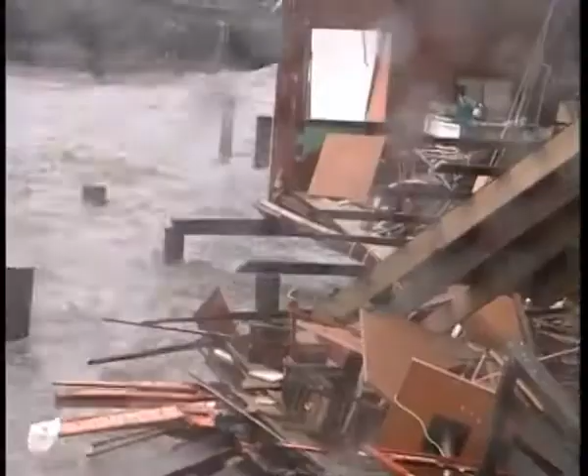Everybody knows the whole New Orleans area is built in a saucer. All of the rainfall that falls on New Orleans is trapped in that saucer and has to be mechanically pumped out. The city is surrounded by levees, so every drop of water that comes into the city, whether by rainwater, infiltration under the Mississippi River levee, or infiltration through the sand strata from Lake Pontchartrain, has to be lifted out. So it requires pumping stations of very large capacities.

We're built on a swamp, and the soil dries out. It doesn't subside as much as it decomposes. When the city subsides, it increases the problems.

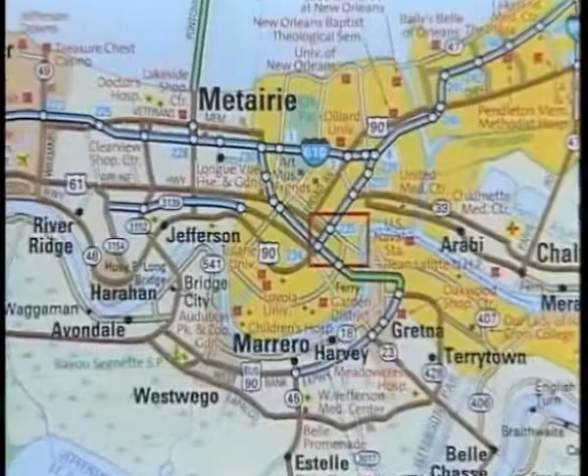Jefferson Parish is located below sea level. Our elevations vary from 4 feet below sea level to almost sea level. So all the runoff, through a network of canals, ends up at the lakefront, where we have our major pump stations. The street systems in this area are dictated greatly by the arrangement of the canals.

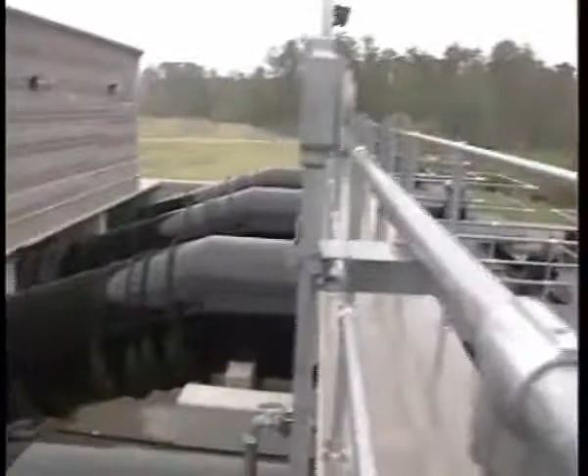We have a system of drainage which is relatively old. Most of our old subsurface drainage system has been designed for a 2-year storm frequency, although our canal systems are designed for a 10-year frequency. We have stations here capable of pumping several million gallons of water a minute in order to evacuate the water, and there are many stations in the area with that capacity.

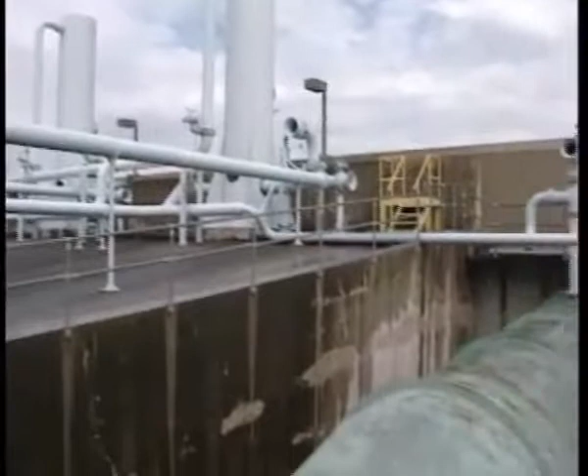On the east bank of Jefferson Parish, we have 5 major pump stations. On the west bank of Jefferson Parish, we have about 14 major pump stations.

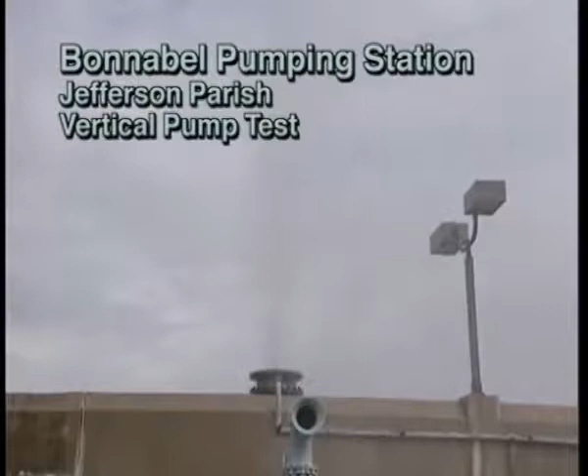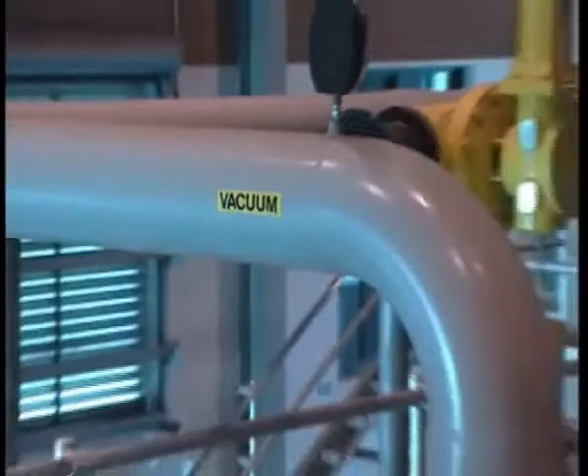Size and capacity of the pumps dictate the size of the station, also the total pumping capacity that is desired, based on the drainage area the pumping station is going to serve. First we develop a preliminary plan for the layout of the station, the discharge basin, and the intake basin.

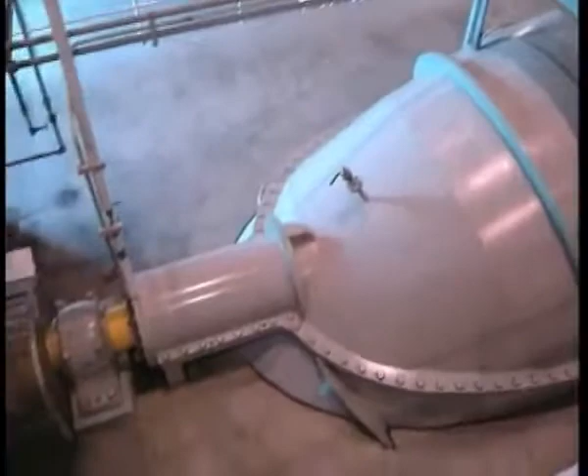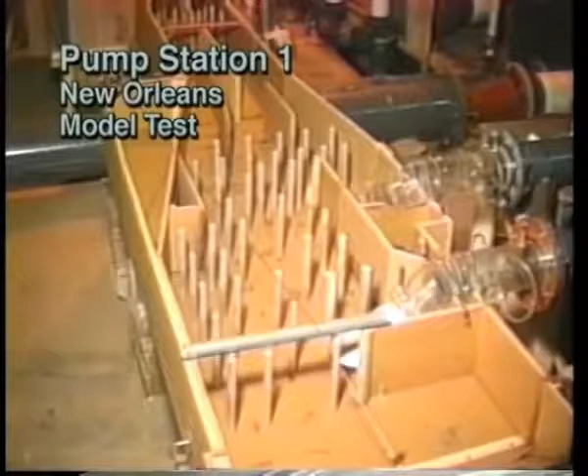Based on the theoretical layout, we provide these plans to an independent model testing laboratory, who constructs a model to maybe 1/10 or 1/9 the size, and they test it to see if our design is hydraulically efficient. Because if it isn't efficient, you can lose 5 or 6 feet of head, which in terms of horsepower and expense, over the 30, 40, or 50 year life expectancy of the station, could add up considerably.

We went in and modeled every station that we made an improvement on, and we found out that the theory back at the turn of the century was: if you want to pump more water, you put in more pumps. Well, that's not necessarily efficient, because some of the pumps were fighting each other.

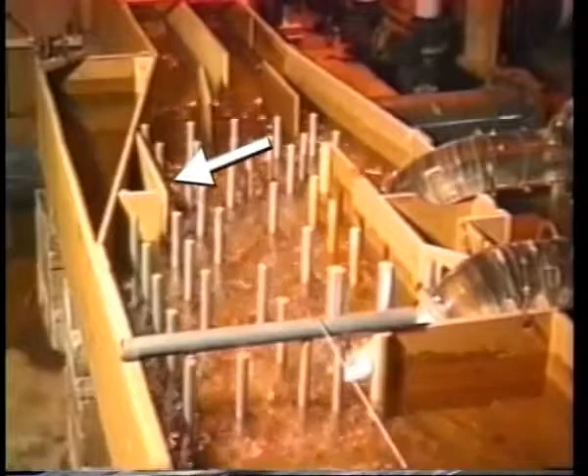By making an authentic model of the station, we were able to find things like vortices being developed on the floors of the stations, corrected merely by putting in small walls in some of the stations. We've been able to improve the stations by 1 or 2 pumps sometimes.

Right now, this station is so efficient, the canal that supplies it is inadequate. We have to more than double the size of the canal coming into the station to get the water to the station.

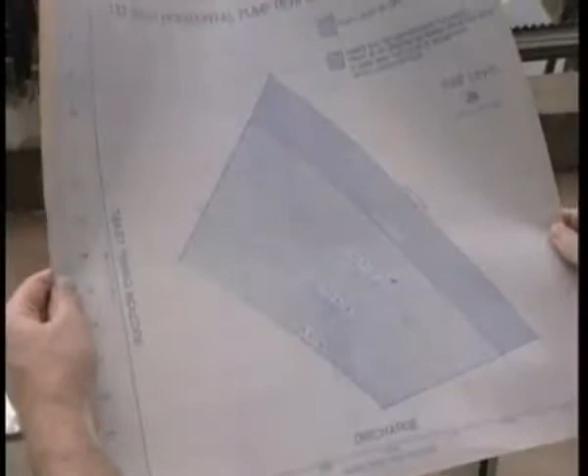Once a pump is selected, it's up to the manufacturer to furnish a pump that meets the engineer's design criteria, both for the head conditions and the CFS capacity it's supposed to deliver. Basically, the pump manufacturer will submit to the engineer a series of design drawings and submittals, at which time the engineer reviews, makes comments, and it's up to the manufacturer to answer and address all questions.

You're concerned about pumping capacity in the development of them, and also the maintenance, the operation and maintenance of the stations, and the longevity of the stations.

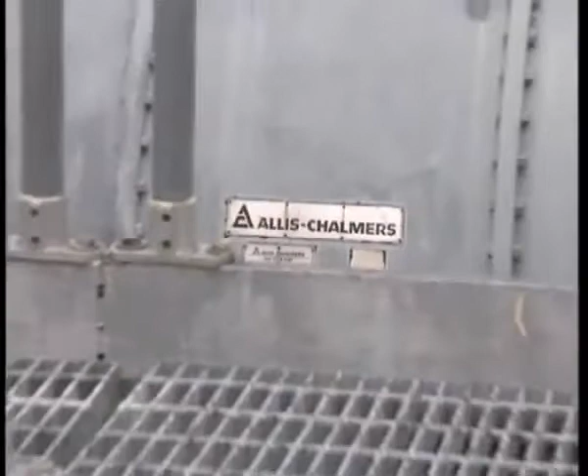These pumps are 11 feet in diameter and cannot be shipped whole, so they come in a number of pieces. All of these pieces have to be aligned, fitted, and assembled. The manufacturer provides an erection engineer who has all of the technical knowledge to assist the engineer and the contractor to assemble these pumps. As you can see by their size, they can't be taken in and out for repair.

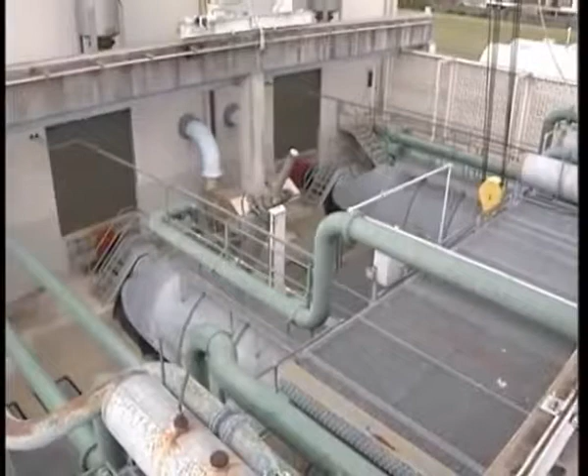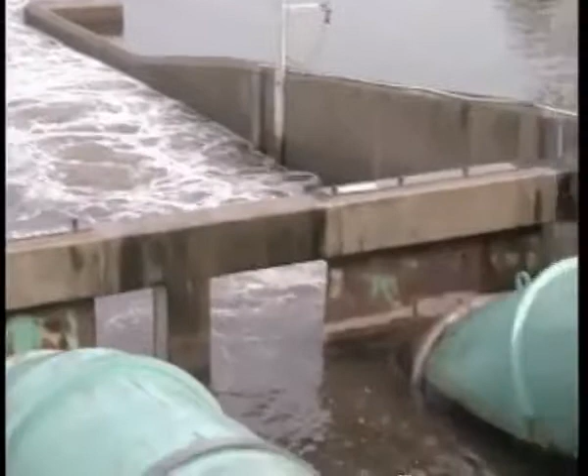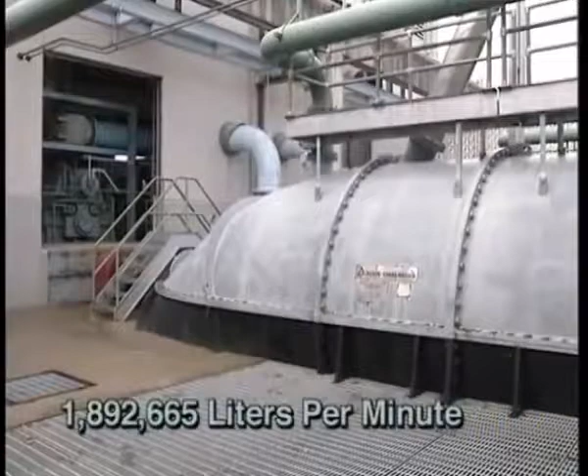So the design and manufacture of the pump requires that they be built to last a lifetime. The vertical pumps have a pumping capacity in the area of 135,000 gallons of water a minute, and they run at 320 RPM. The horizontal pumps, which are the high volume pumps, have a capacity in the area of 500,000 gallons of water a minute, and they run at a mere 100 to 105 revolutions per minute.

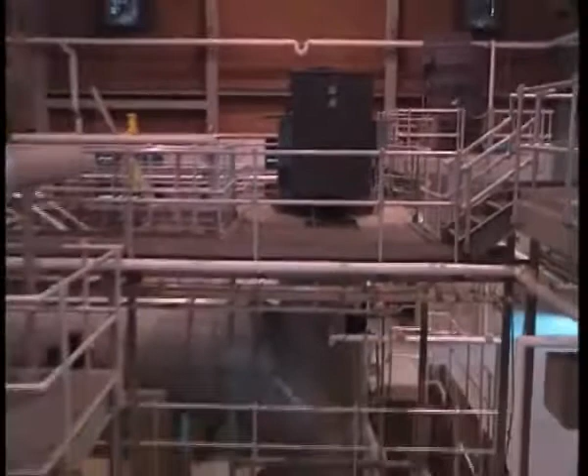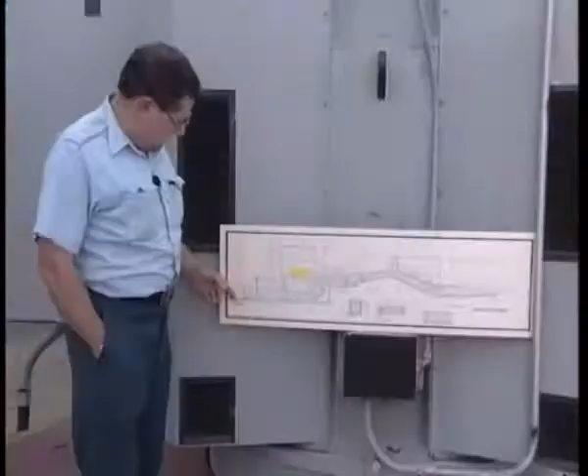This is a cutaway of a typical Jefferson Parish pump station using horizontal pumps. This is a suction canal which feeds water to the pumps. We go through a series of bar screens which prevent trash from entering the pumps, under the trash bridge, through the beginning of the suction tube and into the pump itself, where we have the impeller and the diffuser, which lifts the water and steers it through the discharge tubes.

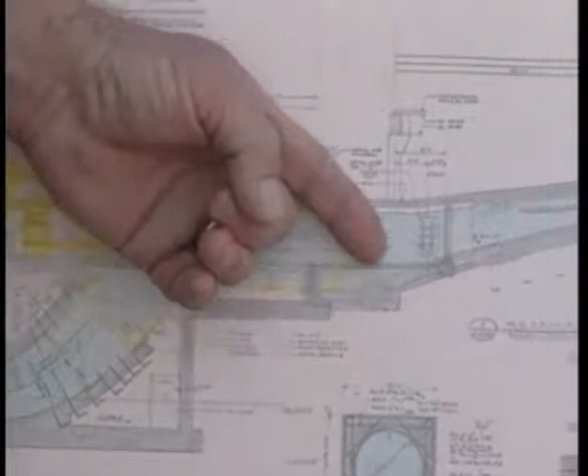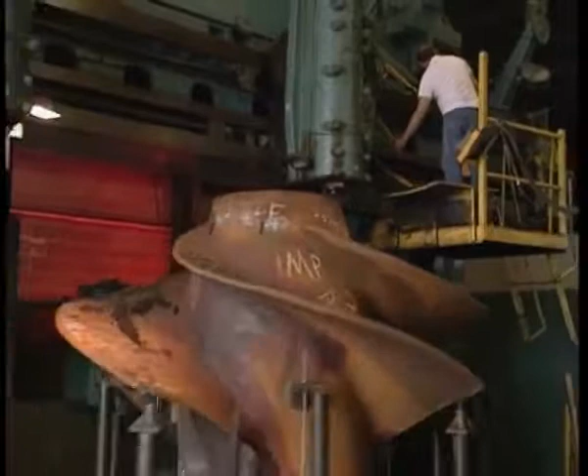Here we have the high point of the discharge, which prevents water from coming back through the discharge tube, downhill through the discharge structure onto the slab, preventing erosion in the bottom of the lake, and out into Lake Pontchartrain. The impeller is approximately 11 feet in diameter. The weight of the rotating assembly, which consists of the impeller, the shaft, and the bearings, is over 50,000 pounds. It's quite a massive piece of steel.

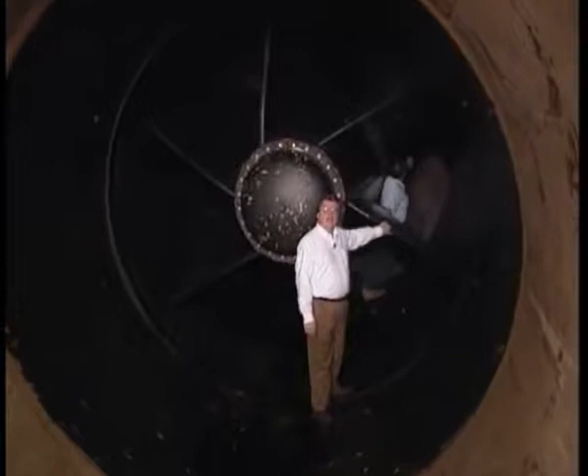The discharge end of a horizontal split case pump used for flood control. The pump is 11 feet in diameter, and I'm here next to the diffuser of the pump, and Billy is down at the end where the impeller is, on the suction end of the pump. It's an 11-foot diameter, four-bladed impeller which is capable of propelling about 1,050 CFS of water at 100 RPMs.

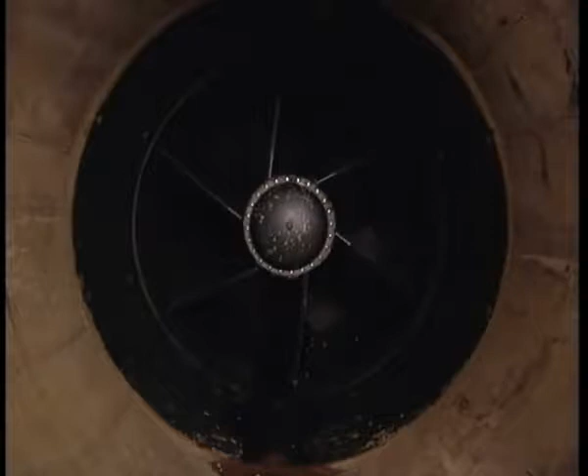Once the water leaves the impeller, it's pushed through the diffuser. The function of the diffuser is as a flow straightening device - it smooths out the discharge of the water through the discharge tube. Once the water leaves the tube, it goes into Lake Pontchartrain.

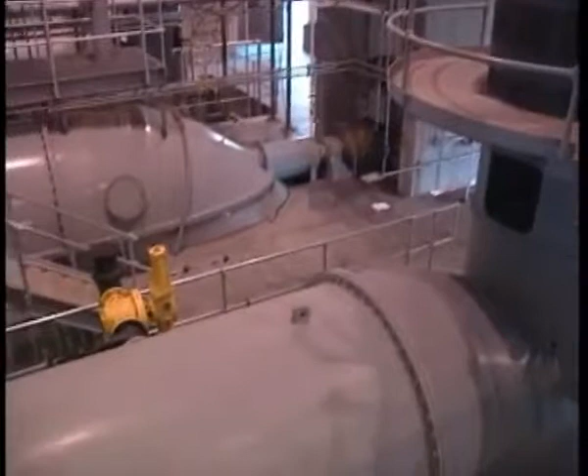These pumps move a lot of water at low head conditions. They're very efficient, easy to operate, and also very easy to maintain because they're high and dry when not in use. The drive mechanisms and the pumps themselves are always above water, whereas with vertical pumps, the lower bearings and impeller would always be submerged in the water, harder to get to. With these pumps, they can be maintained in a dry condition.

We have about 28 of them in the system, and we've only taken the cover off of one of them. The first large ones were put in back in 1912. On an annual basis, our pumps run anywhere from 50 to 100 hours a year, although in some wet years we've had up to 200 hours a year.

Total pumping capacity is around 42,000 cubic feet per second, and we can pump 25 billion gallons a day, or a little over 1 billion gallons an hour during a rain load, and we often do that. It's not unusual that we'd have a full house at almost every station in the system.

If a pump goes down, it could be catastrophic as far as house flooding, street flooding, and so on. Most of these stations have redundant ancillary equipment to ensure that pump will run, either during power loss or loss of cooling waters and so on.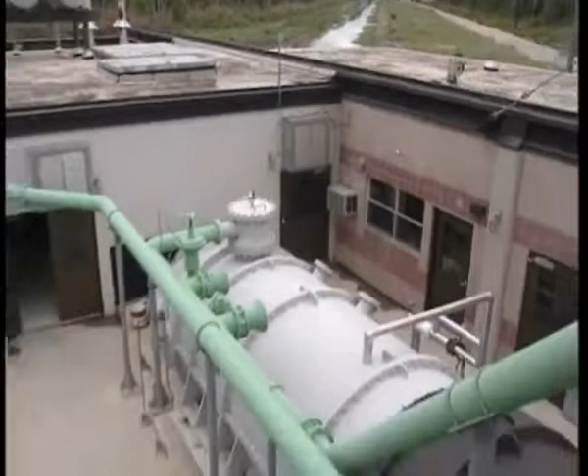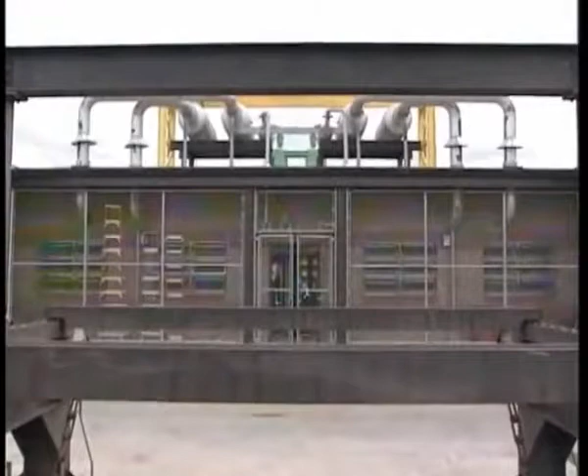We're at the new Estelle pumping station on the west bank of the Mississippi River, using AC pumps along with gearboxes that we provided, and coupled them to engines that were owned by the parish. So it was a sizing effort between the parish and AC Pump. The capabilities to provide that kind of design is our specialty.

Every pump that we manufacture is custom made. Each pump meets specific hydraulic needs that the station requires. In this particular one here, we have pumps that are moving 600 cubic feet per second.

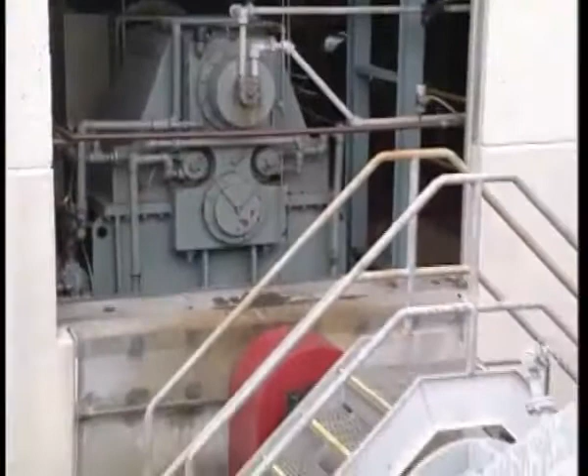AC Pump has supplied all the existing equipment that's been installed in Jefferson Parish to date, and they have the contract for the future pumps. They have a very knowledgeable technical staff - they've always been there if we've had any questions concerning the pump design. They come down and work with you when you're installing the pumps after the manufacturing is completed. They supervise the installation, answer any assembly problems, and address all questions.

These pumps are built with top quality material and craftsmanship, and are engineered for life.